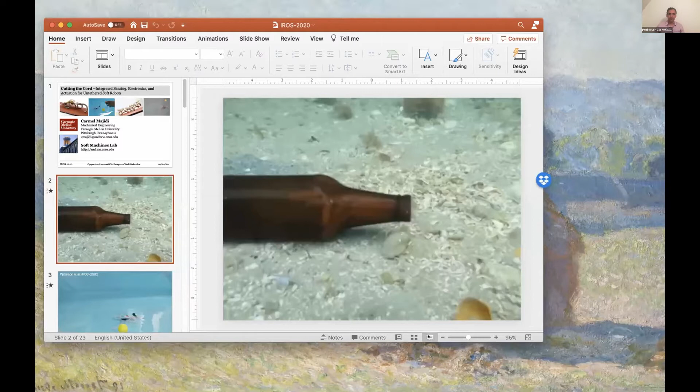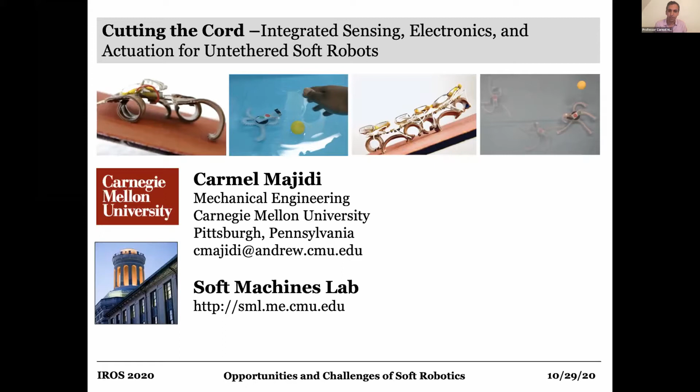I'm going to present work that my lab has been doing on trying to build untethered soft robots. As Nathan discussed in his earlier lightning talk, this has been a challenge in the field of soft robotics, both for larger types of systems and also for these smaller robotic systems. For my group, a big source of inspiration has been soft marine organisms that are capable of really extraordinary functionalities, largely with soft materials.

Here's an example of an octopus coming out of a beer bottle. I'm sure you've seen plenty of other videos of octopuses doing amazing things. Really the best that we've come, at least in our lab so far, is this next clip here, which is our not quite octopus-inspired, but more brittle starfish-inspired robot that we call Patrick.

In this presentation, I'll go through the steps and iterations that brought us to this point. Patrick is a fully untethered robot, powered using shape memory alloy actuators. There is onboard electronics for power regulation, control, and you can see that little antenna sticking out for wireless interfacing, but there's not yet onboard sensing, which represents an open challenge for us. I'll talk about what brought us here and what the next steps are for making robots like Patrick fully autonomous and not just untethered.

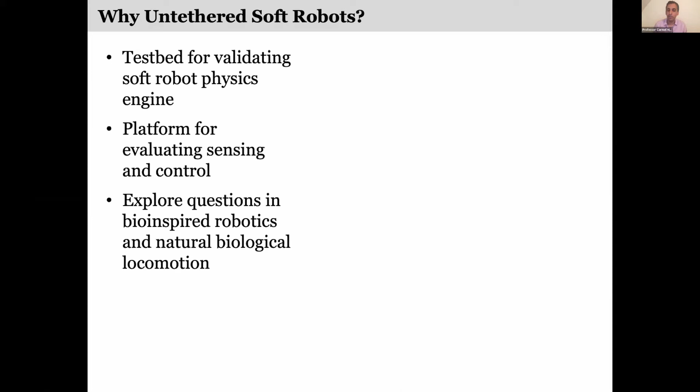So why untethered soft robots? One is this grand challenge of fully autonomous soft robots, but in the near term, we're also interested in engineering soft robots to function as test beds to experimentally validate some of the soft robot physics engines that we're developing. Here are a few clips showing different types of robot implementations we've built in the lab and some validation we've done of a physics engine we're co-developing with collaborators at UCLA.

This is work led by Khalid Jawed over in the MAE department. So that's one area where we want these robots to be untethered so that the tether doesn't interfere with the fidelity of the robot locomotion and mechanics. Another is that these robots can function as platforms for evaluating novel types of sensors and control schemes. And going beyond even robotics, these test beds could also be used to better understand natural organisms and explore broader questions within bio-inspired engineering.

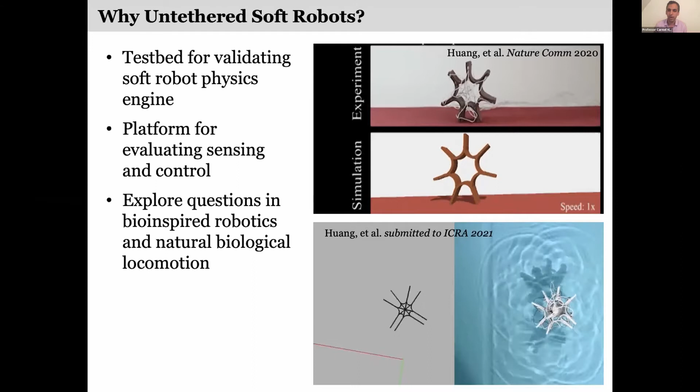For us, building these types of untethered soft robots has been more of a comprehensive effort. There's been work on the actuation side and also on the sensing side. I'll start by talking about some of the considerations in actuation. There's quite a lot of different architectures we've seen in these talks for powering soft robots, and among these, we've actually had the most success with shape memory alloy.

A lot of this work was inspired from my experiences as a PhD student working in Professor Ron Fearing's group, where they were able to create all sorts of untethered, not quite soft robots, but highly compliant and miniaturized milliscale robots powered with shape memory alloy. Firsthand, even though I wasn't doing research in that space, I could see how effective SMA is for achieving these battery-powered robots.

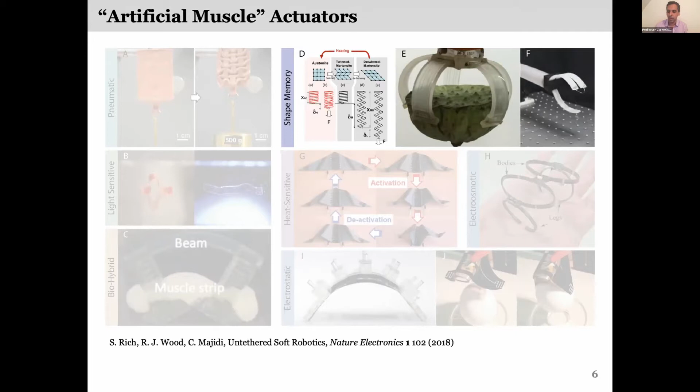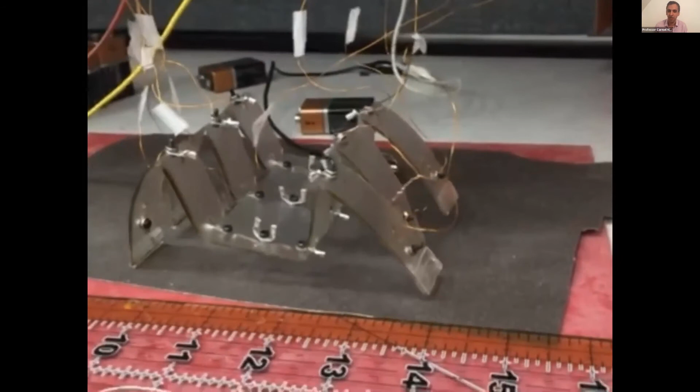Of course, there's limitations with shape memory alloy, and generally there's pros and cons with all these different mechanisms for actuation, as we've been learning in this workshop. But starting out, I felt SMAs are good enough. However, we started hitting some bottlenecks, and this is an early attempt at an SMA-powered compliant robot - this is a real-time video, and you can see it's quite slow.

Basically the power requirements or battery requirements necessary to power all these SMA coils, which you can't really see here but are tucked in - actually each one of these legs has 2 coils, one here if you can faintly see, and then another SMA coil there. But the robot wasn't able to support the weight of all the microcontroller, the PCB board, and also the battery. So this was an early fully tethered implementation.

Soon after, we discovered that there was a more optimal way - I use the term optimal here very loosely - to create actuators that were a little bit faster, a little bit more robust.

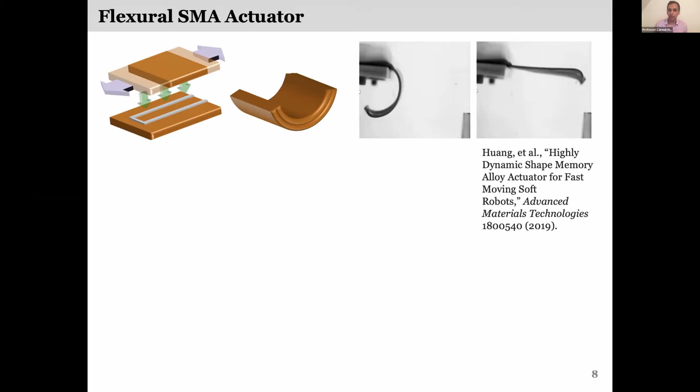The way we achieved that was to take a wire of shape memory alloy, loop it around, and stick it between two films of thermally conductive rubber. One film was pre-stretched, which induces a residual curvature. When we pass electrical current through the SMA, it goes from being malleable and compliant to very rigid, and it wants to straighten out, causing this kicking motion.

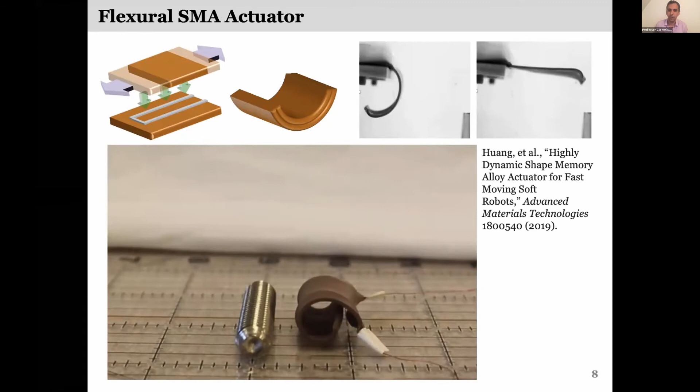You can see it here with this single soft robot limb. The hope was that with this dynamic, high force output motion, we might create robots that are more load bearing and faster, so we can make fully untethered soft robots. We did some characterization and then some implementations.

I'll show you videos of a soft robot quadruped and also a caterpillar, where we make these fully untethered. All the LiPo batteries are just stacked on top, and we use a flex circuit for control and power management.

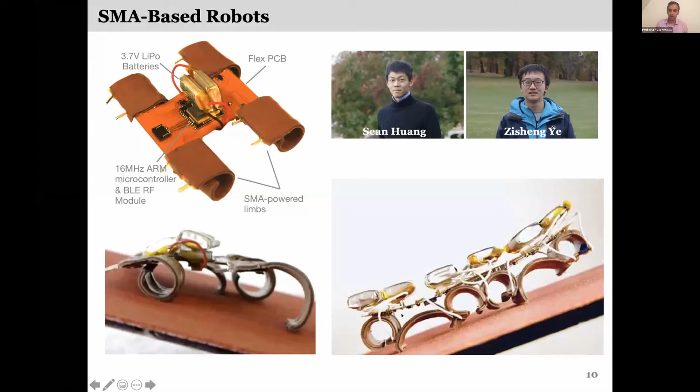Each limb here is basically that SMA wire looped and sandwiched between these thermally conductive rubber sheets. These are real-time videos, I'll just turn the volume off.

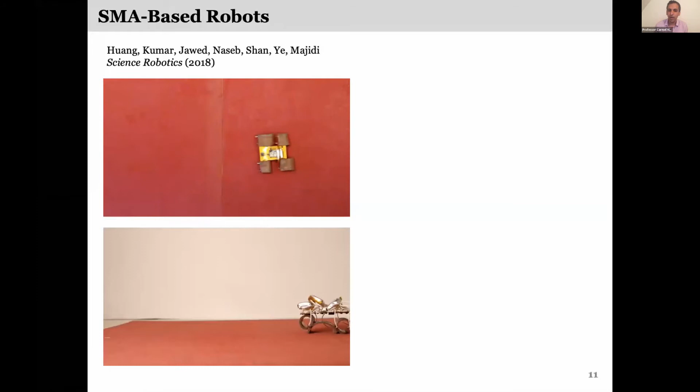You can see we get motions that actually start approaching the walking speeds of some biological organisms. We're not quite at one body length a second, but we're at the cusp of that, and since these videos were taken, we've had some implementations getting motion at a body length a second.

If you compare where these soft robots are compared to biological organisms, there's still quite a ways to go in achieving biologically relevant walking and running speeds, but there's good progress, and certainly improvements over past work with pneumatically powered untethered soft robots.

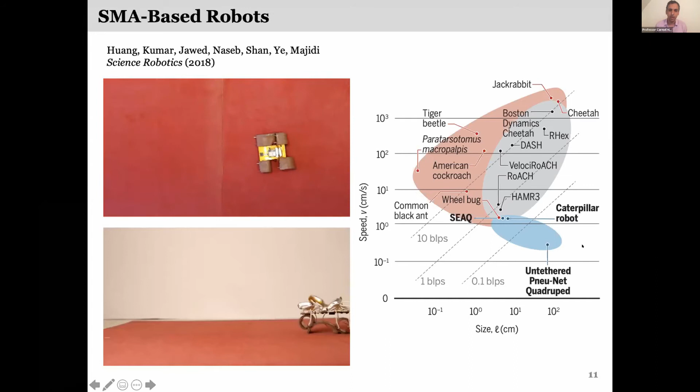A next step for us was to see if we could create a swimming version of these untethered soft robots using the same shape memory alloy architecture.

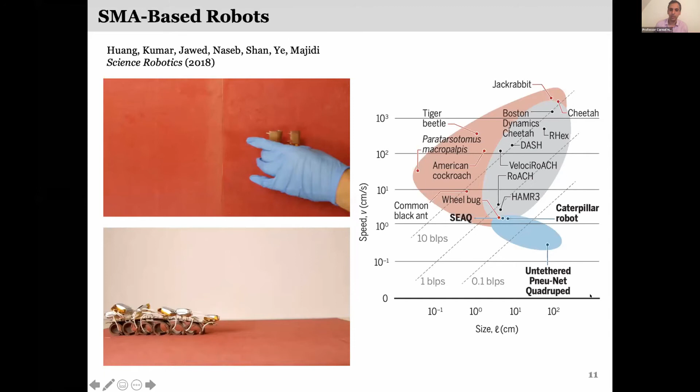Here's an early attempt, and we're a bit back to square one here. In this case, we have 8 of these actuators arranged in a radial type pattern. It looks fast at 10x, but at 1x you can see the speeds aren't enough.

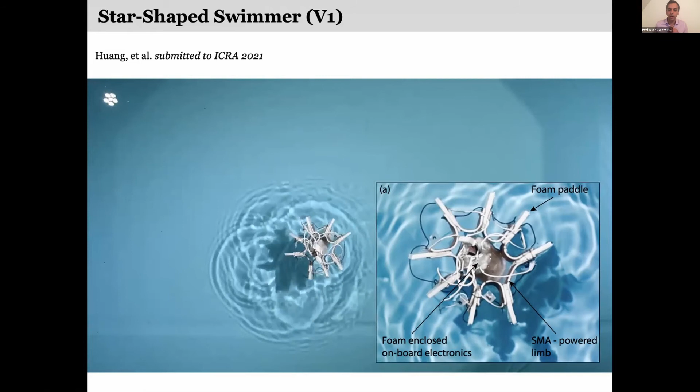These speeds aren't really enough to use this as a test bed to examine natural biological swimming, say of a starfish, or for validation of a soft robot physics engine, because this motion doesn't capture the dynamics and hydrodynamics we'd want to model.

The next attempt was to switch up the design. Instead of having the wires operate in that flexural mode, we had them operate in a linear contracting mode, but the swimming speed was even worse.

I haven't put the timestamps here, but it was pretty abysmal in terms of the ability of this swimmer to move across in this water bath.

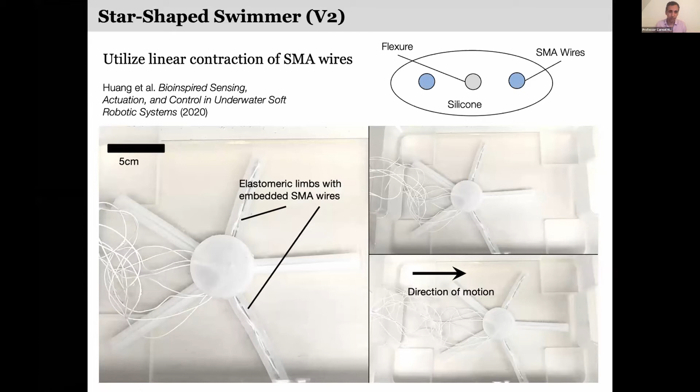Finally, we converged on this third version, which is where we currently are. We replaced the straight SMA wires with coils. Tons of folks have adopted these SMA coils for artificial muscles.

We were particularly inspired by work from Bristol University. Of course, Barry Trimmer has done a lot of really exciting work using a similar architecture.

One variation compared to what was done at Bristol is that instead of having just two antagonistic coils on either side of this flexure, we actually have four, which allows for bending both in the plane and out of the plane.

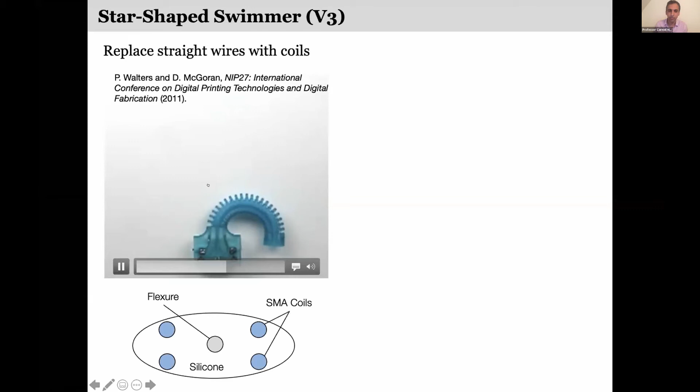You can see it's a bit difficult from this top-down view, but the limb is not just bending side to side, it's also bending up and down, and that's critical to capture another mode of locomotion for starfish and brittle star, which don't only paddle but also crawl along the seabed, giving them somewhat of a crawling or walking gait.

Other features of this: we have our onboard battery. Like I mentioned before, there was an antenna sticking out that's semi-submerged in the water bath, allowing for radio communication over Bluetooth. We have a Nordic microcontroller module that has both the processor for control and the wireless module for offboard communication.

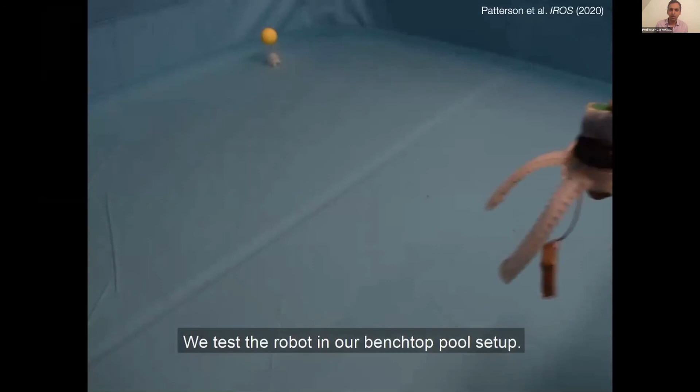And then we just use very simple computer vision to do tracking of Patrick and also tracking of the obstacle or the target. So we perform some simple target-following tasks here.

To aid in that, we also did some calibration to come up with simple motion primitives. So based on where the robot is in relation to the target, it can perform path planning based on those primitives. It's not great, plenty of room for improvement, but it eventually finds the target with the aid of computer vision.

And then it will start crawling towards it. As that target moves, the robot will adapt its path accordingly. I'll let this video play out a bit. In a few seconds, you'll see that as we move this target, the robot will reverse course.

Because of the axisymmetric, star-shaped nature of this robot, it has omnidirectional properties. So it doesn't really have a front or a back. It can easily maneuver and turn as needed to follow the object.

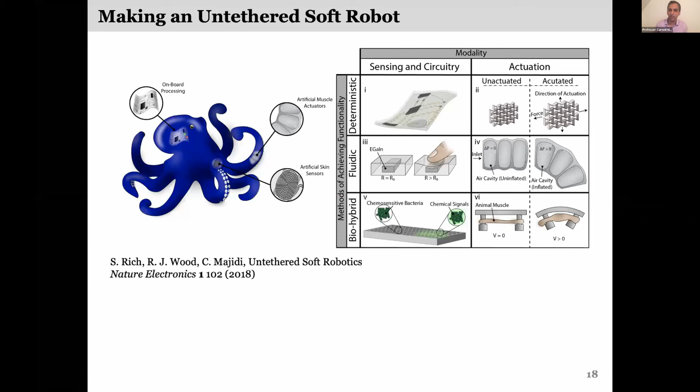Okay, so that's the robot in terms of actuation, but the sensing is all done off-board with that camera. So the next step for us is to do onboard sensing. An approach we think could be very promising is to use liquid metal not just for the electronics and circuitry, but also for the sensing.

Here are some early examples of work we've done in the past, creating a stretch sensor using a liquid metal channel inside rubber. This is a 9-axis IMU along with a temperature sensor, these are microelectronic chips, but the wiring is all achieved with liquid metal.

The hope is that because we're using liquid metal, it will be more compatible with the silicone rubber we use for the body and limbs of the soft robot. So we can drop in these microelectronic chips and use liquid metal wiring, avoiding the need for rigid or flex PCBs along the limb. The purpose is to preserve the overall mechanics of the limbs of the robot.

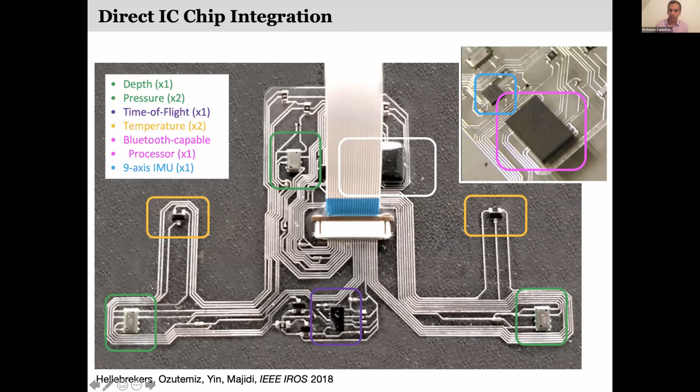To demonstrate that, we did a simpler implementation on an underwater soft robot gripper, where we created an electronic skin with different microelectronic chips embedded inside, again with liquid metal wiring to connect all the pins. The skin is fairly soft, flexible, stretchable, and conforms easily to that soft robot gripper.

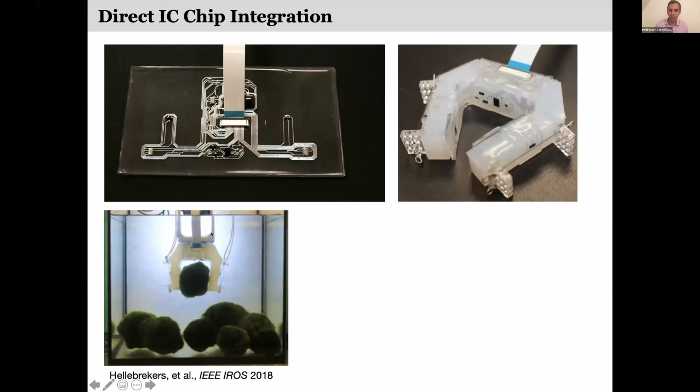Again, here we use coiled SMA for the actuation. With that elastomer sealing, this electronic skin and gripper can function underwater. And then out of water, here we demonstrate the different sensing modalities.

With this gripper, we have pressure sensors on the left and right finger, and a time-of-flight sensor for object detection. We're able to detect the location of objects, then command the gripper to go in and grasp the object and perform simple pick and place tasks.

In the next clip, I'll show the case where we knock out that object. Here's another object where, again, it grips it and picks it up. Now what we're going to do is remove it, and automatically the gripper will detect from the pressure sensors that the object has been removed, and it will go rescan for the object.

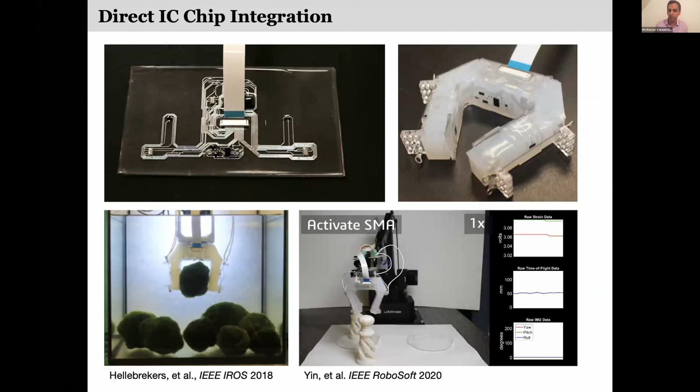All of this is done through a simple Markov sequence, but it doesn't require any manual intervention. So that's the idea moving forward with incorporating sensing so we could eventually have fully autonomous robots.

Another challenge for us is that these SMA coils are pretty power hungry. With our onboard lithium polymer battery for Patrick, we use a drone battery, and we use that up in about 10 to 30 minutes. In some sense these SMA coils are a surrogate for other artificial muscle actuators, better ones that could come along in the pipeline. We're eager to collaborate and utilize whatever you've had success with.

As far as autonomy, untethered is not enough. We're going to have to get onboard sensing for proprioception, motion tracking, and monitoring the environment. Also, we're going to need more capabilities for onboard computing for decision making. Right now the controller just gets messages from an offboard computer about which locomotion gaits to execute, so all that should be done onboard. We also need to find more compelling use cases where we actually need soft robot autonomy.